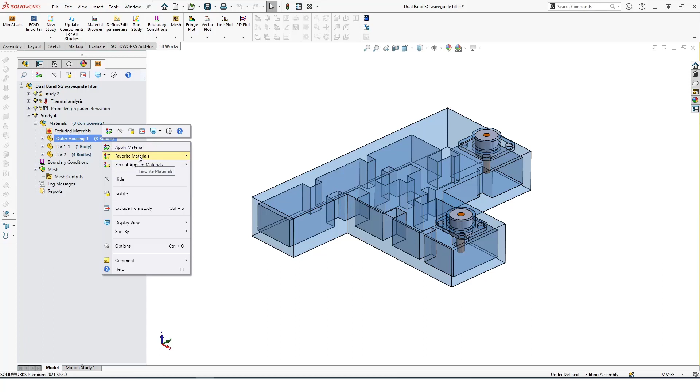Start applying material. The housing is just copper, so my favorite material, copper. And I have this. This is the cavity filter, which is the air region. I go to my favorite material again, and then these are different bodies. These two are the inner or central conductor of the coaxial cables.

So those, I can apply material, and the cable, they can choose Teflon, and this, actually these are copper, okay, and these two are the Teflon. Okay.

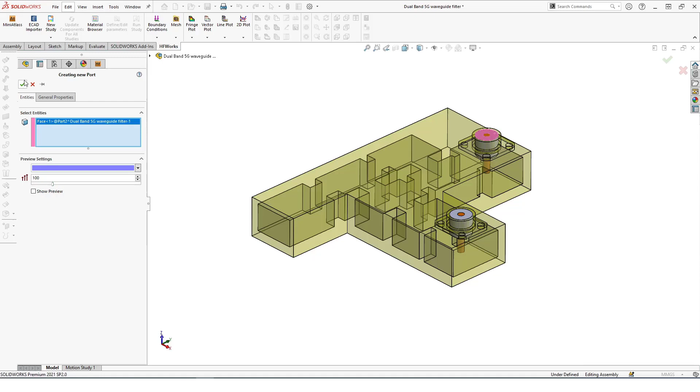After that, the only boundary condition I have to apply is the port boundary condition. So that is port 1, it's a coaxial waveguide, and then another port boundary condition, and that is port 2. The rest, meshing is adaptive, it's automatic, so you don't need to worry about it. So once you do that, after you run, let's quickly go and look at the results.

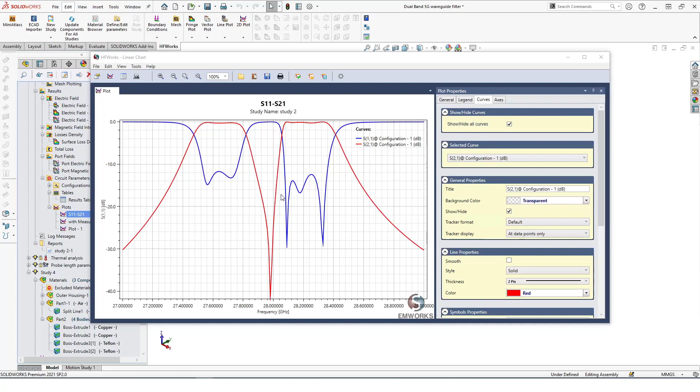So the first set of results is the S11, S21. As you expect, it's a dual band, so you have two passing bands. Okay. This is the HFWorks results, and again the measurement, so as you can see it's very close.

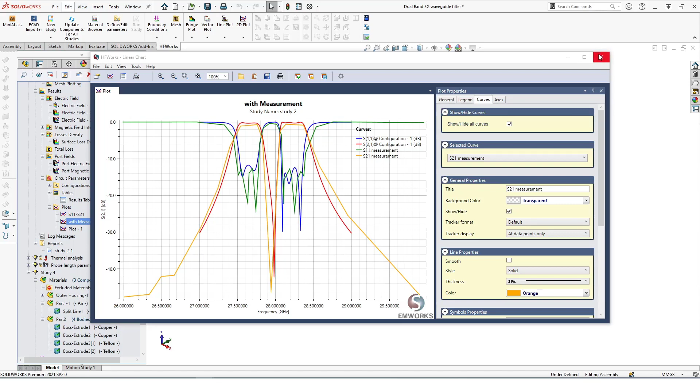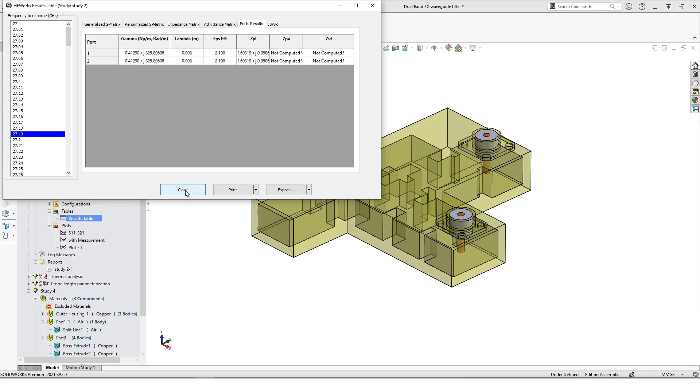You can also look at table results. The table results for each frequency, you have these results available to you. Starting from the generalized S matrix, renormalized, Y and Z matrix, and port results. Okay, and then you can look at the field data.

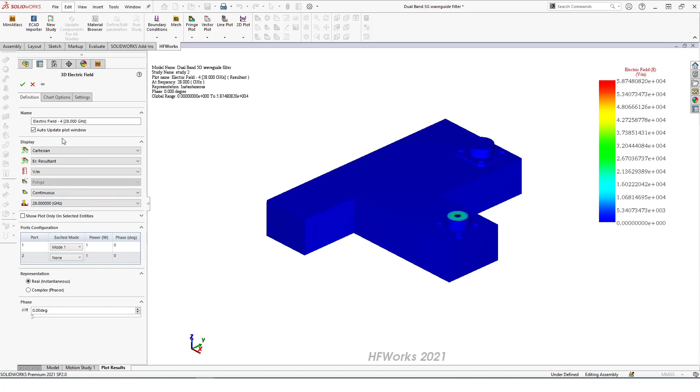So you can plot, fringe plot. If you want clipping, no clipping, let's do no clipping first. Okay, and then we can excite mode 1 or mode 2, and then if you want to look inside, you right click, clipping, you do section clipping, and then it's coming.

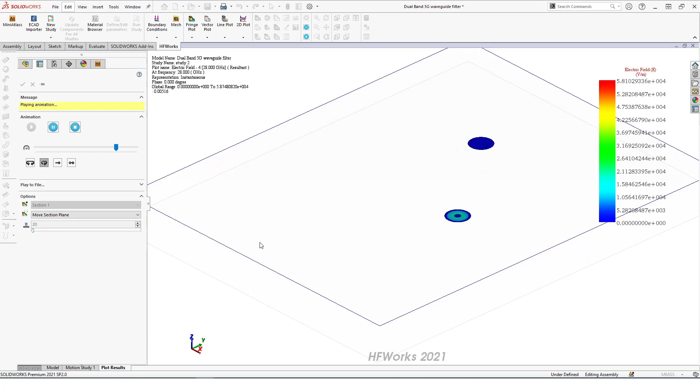So you want to put section only, I can move my section around, say okay, and then actually I can animate versus sections. This is automatically going to create different sections. There you go. It's showing you how you can look at the field at different cut planes.

If you want to look at the vector, you can look at also vector, no clipping. So this is your vector field, and again, this is 1 watt power, you can excite with whatever watt power at the input port.

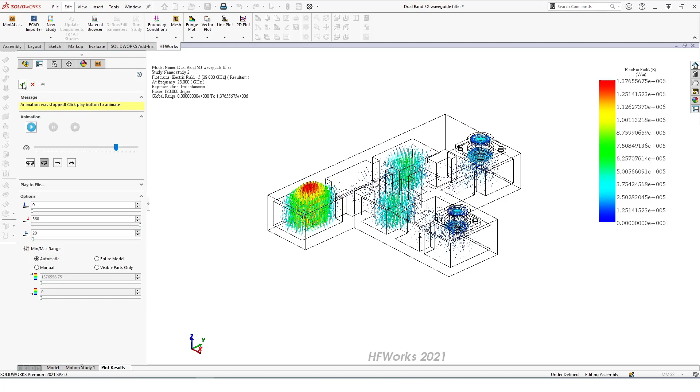You can excite with mode 1 only, or port 1 only, or port 1 and port 2, and you can superimpose. You can say I put 200 watts here. There you go. I can again animate. Okay. So as you can see, you can very quickly create a study, run it, and visualize the results.

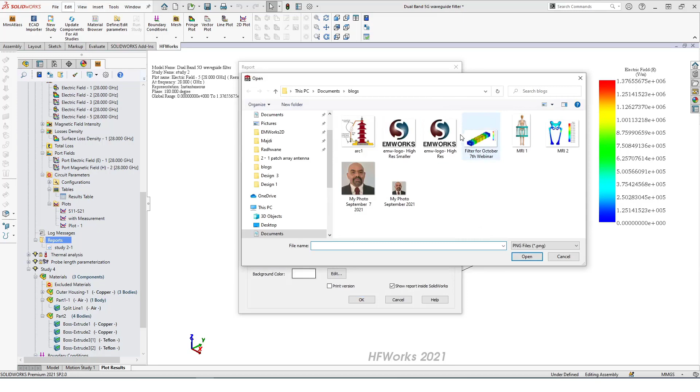If you want to look at the loss density, you could. At the end, create a report, generate a report. You can customize your report. I can put my company logo. I can put my name, company, date, and generate an HTML report.

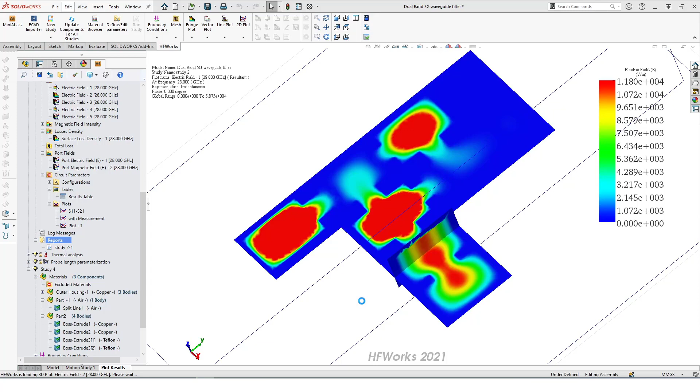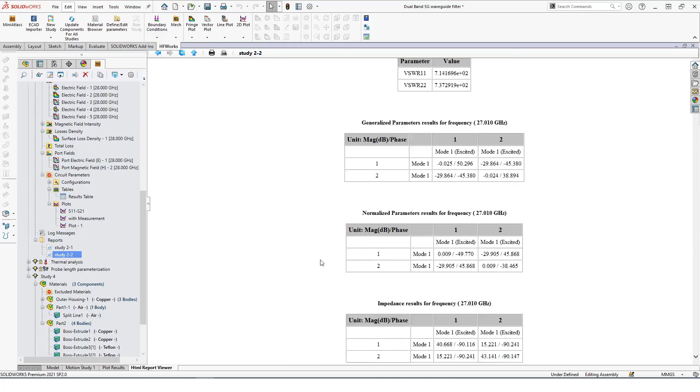The report will have everything, all the pre and post processing and the simulation results, all in a nice, concise report that you can access or share on the web or with co-workers. It's generating the report right now. There you go. Okay, so this is your report. You can jump directly to different sections.

If you want to make a quick change, you could simply copy this study, study 3. And then once I have a new study, I can just go ahead and change whatever I want to change in that particular study. Or if you have many studies, before I go home in the evening, run all studies. That's it.